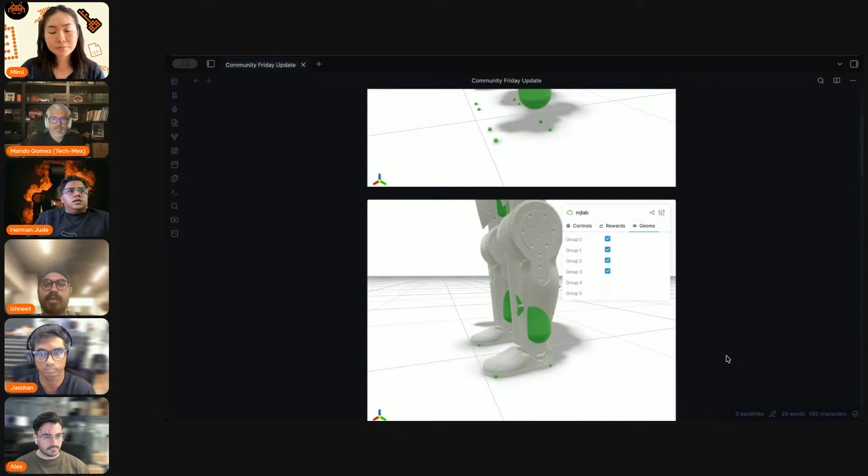So one thing we need to do on the software and training side is try imitation learning. We want to start with a very simple one, which is just squatting, because in this you're just rewarding the model to output the same joints with physics. We know the learned dynamic in this would be much more consistent, and we will know that the policy learns the right thing.

And then we can actually identify what's causing it to limp. So this is what we are doing now. We are testing a squatting policy, and this will help us not overfit to just vanilla RL reward tuning.

Also, when we brought the robot outside, we were able to bring it to a coffee shop on the second floor of a building. This was a good milestone for us because it stress-tested the robot a lot. It entered the lift, and we controlled it fully via Bluetooth.

We launched the firmware with systemd, and then we can just connect this controller via Bluetooth, and you can bring it outside. If the controller disconnects, you can reconnect. So we're testing a lot of quality of life measures to bring the robot outside and make it able to walk in events, etc. These are the results from a lot of our hardware and software debugging, and some considerations we made on our end to remodel the tool.

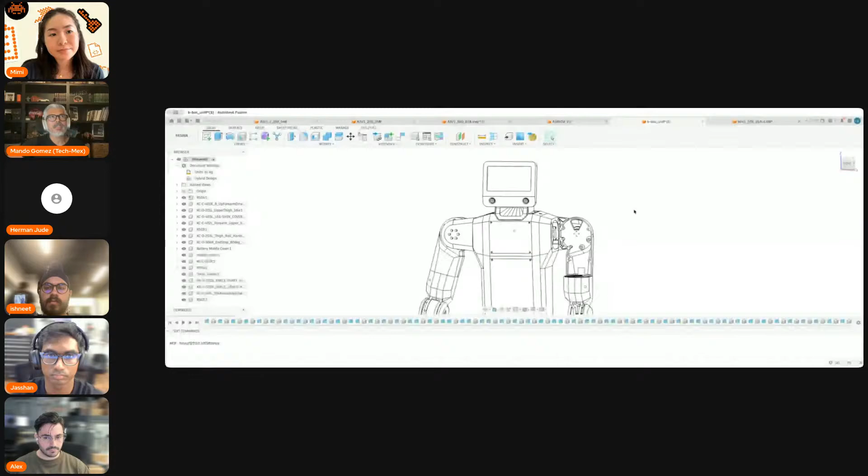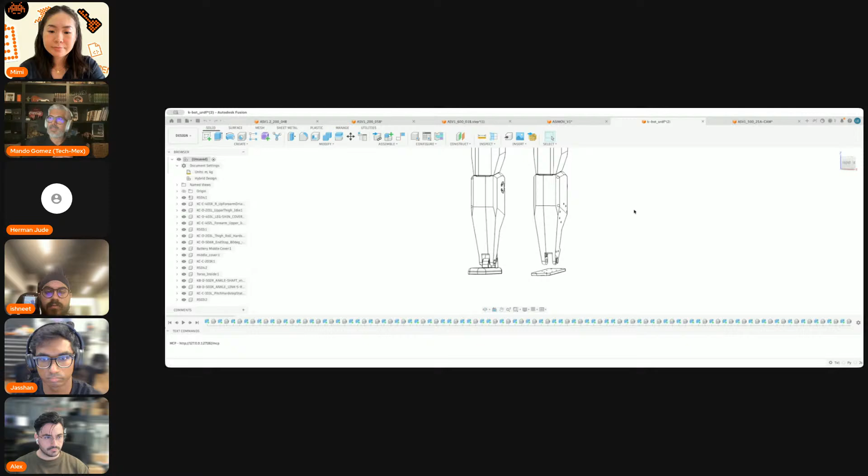So a few months back, probably September or October last year, I was looking into different open source projects, and maybe some of you might recognize this robot. It's basically the KScale KBot, and I was very curious and interested. I went to their offices in the Bay Area and was on their waiting list for the robot to ship, but unfortunately this company shut down in October, November, and I still wanted my humanoid robot.

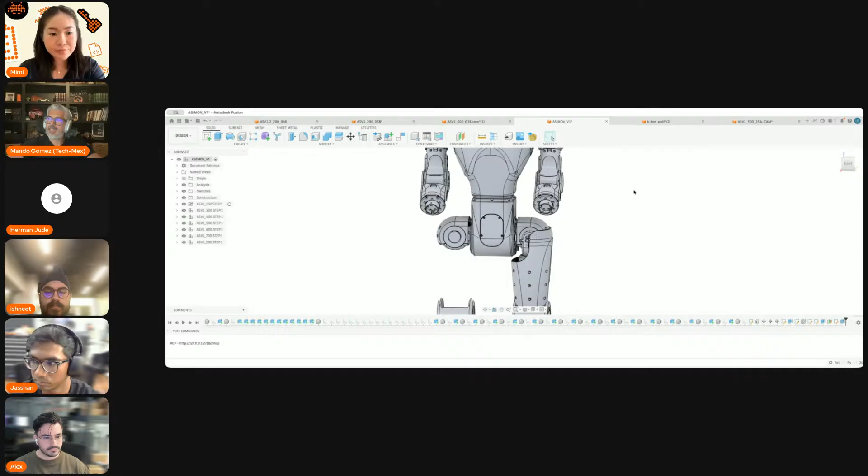That's basically by looking at different robots, I stumbled upon Asimov, and I was very excited to see the different things. I got the STEP file for the legs and started analyzing it, comparing the different open source projects, and I really liked some of the things. So I was looking at the hardware I have at home so I could manufacture some of these parts myself, and that's how I started the whole process.

The last 3 months or so, I have been learning metal casting, CNC, Fusion 360, and so on. So I don't know what questions you guys have.

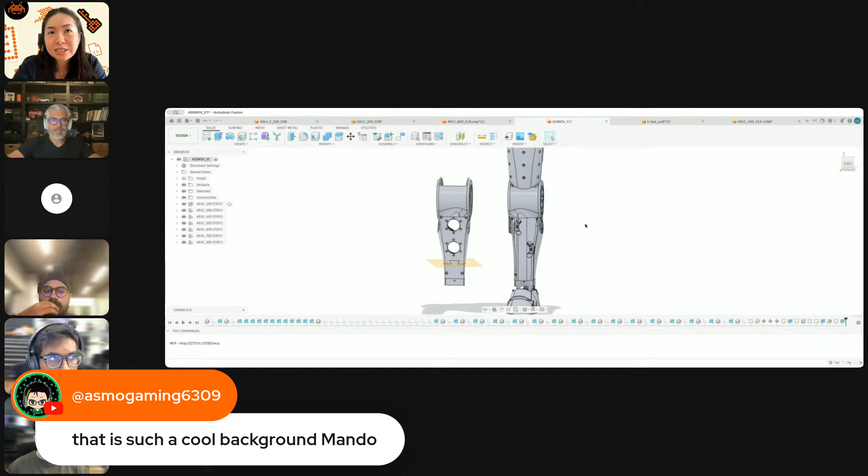Maybe you could mention a little bit more about your background and how hard or easy it is for you to actually build the robot, because I know our community members would be interested in building it from scratch, but how realistically, how hard is it?

I can tell you that there's a lot of disciplines that you have to know. You basically need to know a little bit of 3D, but I can tell you that you can learn. Right now, let me show you a little bit on my screen. Let me stop sharing here and I'll share another one. Now with Claude or Cursor, it can actually help you out. Let me share my whole screen so I can go back and forth.

So basically with Cursor, you can even connect it with Fusion 360, and you can say, hey, can you help me to do this? It's going to burn a lot of tokens, it's going to be a little bit pricey, but at the end of the day, it's going to do it for you.

In some cases it has actually helped me, because one of the things you guys have done is that some parts are very well documented. But I actually stumbled into a problem. I ordered it in January from a different company.

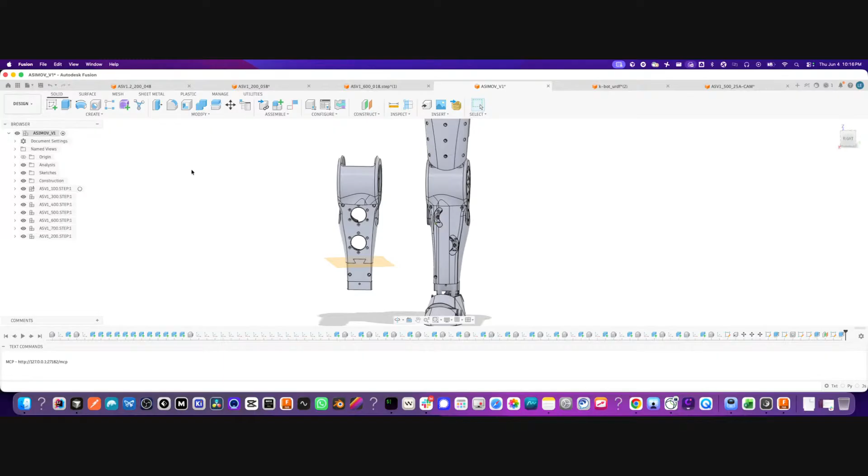Let me show you here, and by the way, they are not a sponsor or anything. This company is called MyActuator, and they were the cheapest ones that I found so far. I didn't know about Encos — if not, I would probably just go with them. But I got 3 different actuators, and I have some of them here. By the way, they are heavy. One thing that's interesting about these actuators is that it has these notches, so it's not a full circle. I kind of like it though.

It becomes a nightmare to be able to strap it properly because it's not a circle. And we have another one — this one is an X436 that is also very similar to the ones we're going to use on the shin.

I want to show you a little bit of the progress. I already have the 2 legs — one is kind of complete, I have it at the bottom. Unfortunately, you guys are removing the toes, but I actually did the toes. So it has the different parts — the ankle, the different sections. Some of the pieces you see here I machined myself, because the BOM was released a couple of weeks back, but I started machining them.

Maybe a couple of questions were asking about how difficult it might be to do it realistically by yourself — I've been doing it. Everything that you see there, I have been doing by myself.

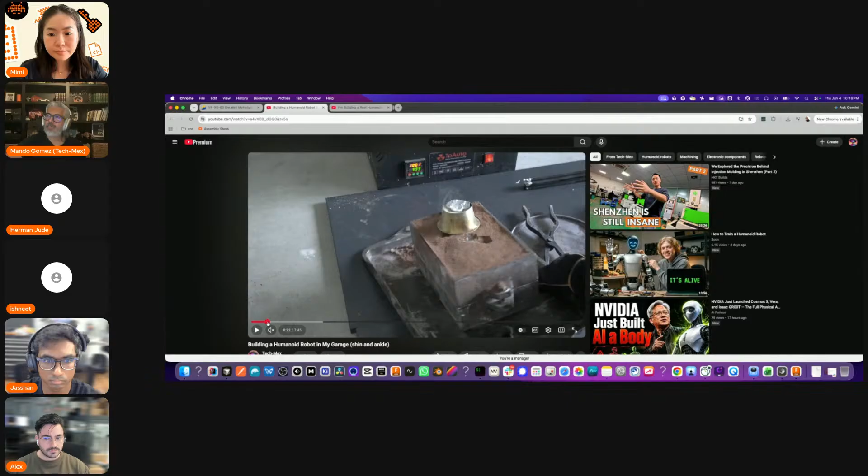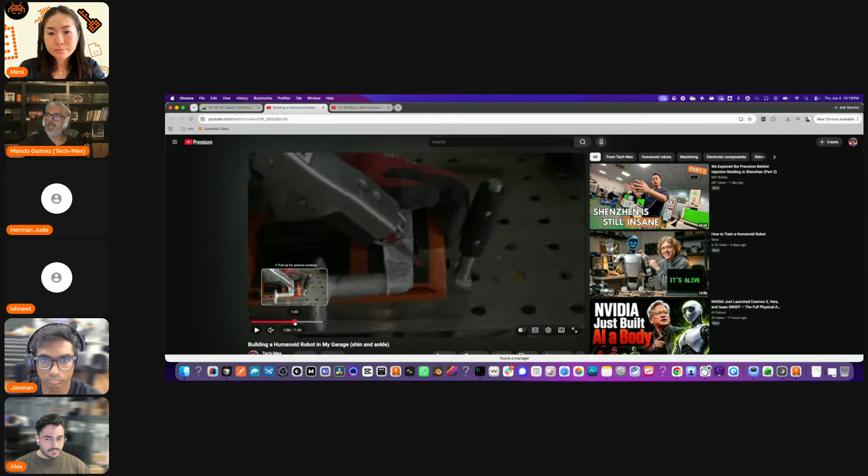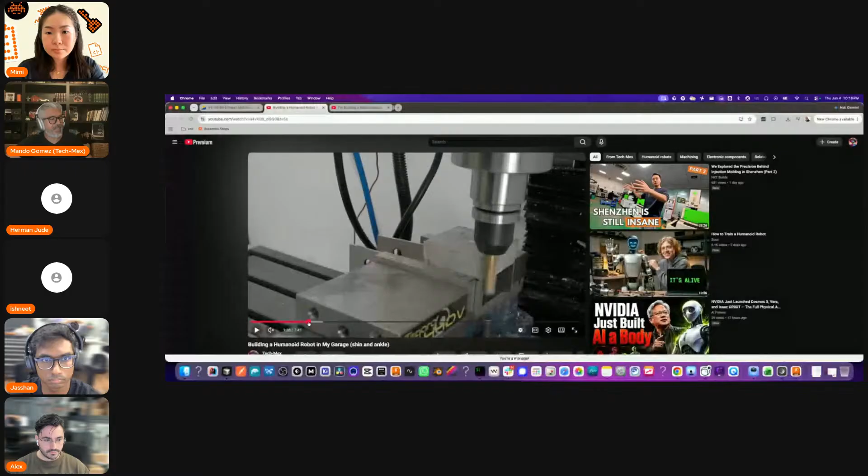You can learn a little bit of sand casting. I'm doing it myself, and I'm in the community, so if you guys have questions, you can ask me. I'm learning a lot about CNC, but there's so much information and files out there that it becomes straightforward. Ultimately it's a lot of work. If you want to wait for the kit from these guys, sure, go for it. In my case, I have 30 of these actuators, and I didn't want to waste them, so that's the reason I'm modifying a lot of the designs in order to be able to hold these actuators.

Thanks so much for working on this, it's really cool, especially the casting part. We didn't think someone would actually try to cast it, because we 3D metal printed the part. But casting actually makes sense, you're able to get the same geometry.

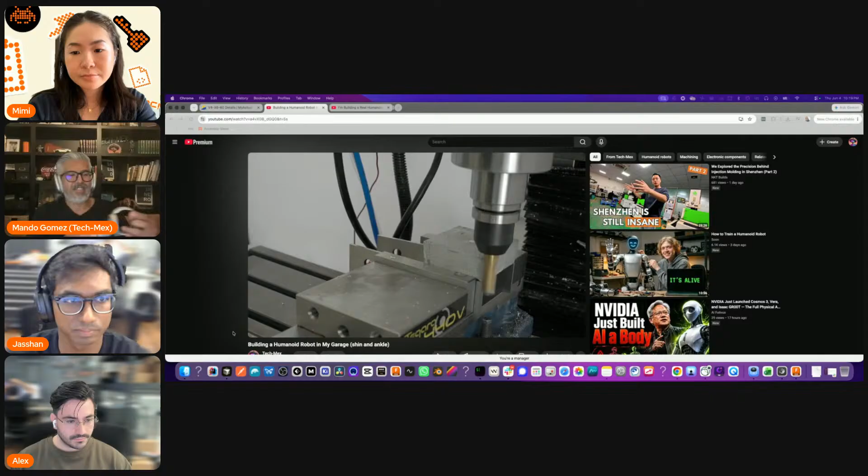Today, this is something interesting, I actually posted this. This is the one I did literally today. I'll post the video, but basically it's the strap. I know you guys have it with a gap here, and I think I have it on Fusion 360 - let me see here, maybe one of these, yes. My actuators are a little bit bigger, but this is basically the redesign, and that's a shout out for you guys. The design is very easy to modify - you have the parametric design, so you can just open it on Fusion, Onshape, or SolidWorks, and it's modifiable.

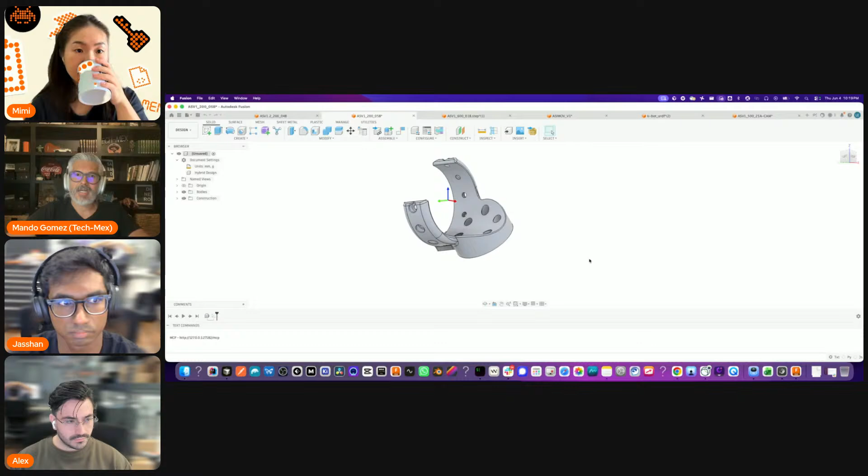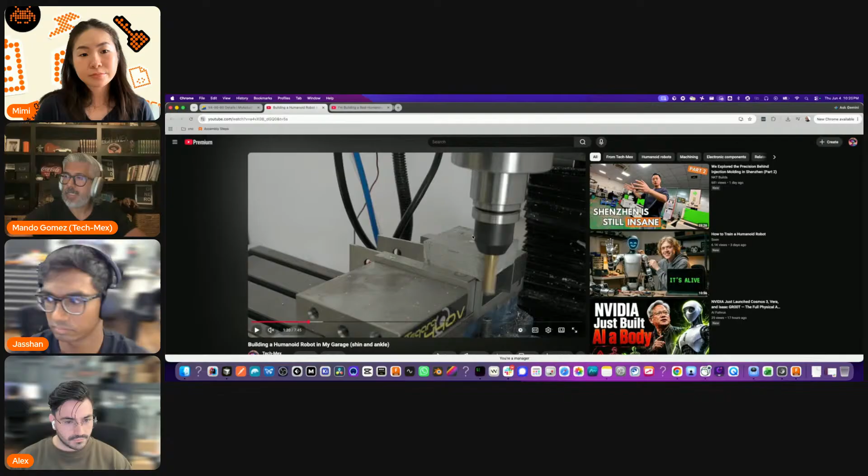Between the tools that you might need is a CNC. I have been using a Carvera, the desktop one, and I also have a conversion of a mill - this one is a Chinese mill called the G0704, and I also robotized it. Basically I made a regular mill into a CNC. I have videos in the channel showing how to do that. But if you don't want that big of a machine, you can get a Carvera.

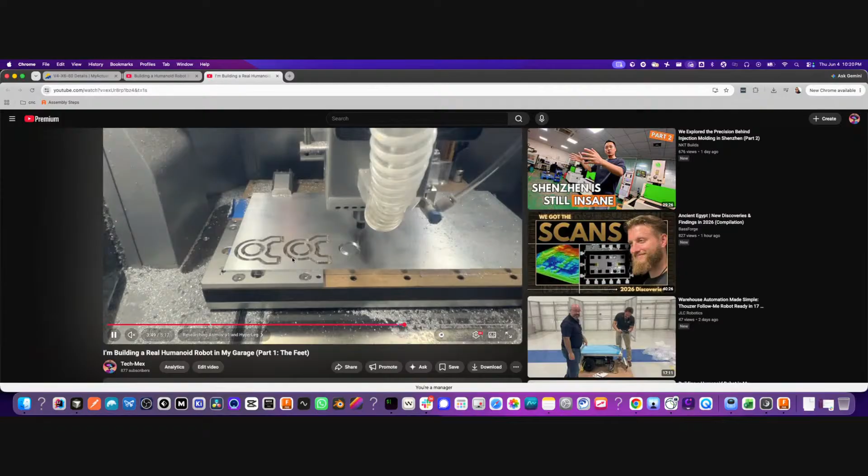So here's a snippet of the Carvera - it's gonna take a while, I think this part took maybe 2-3 hours to make. As you can tell, these ones are part of the BOMs, and maybe you might not want to build it yourself, you can just buy it from goBILDA, that's the company. But I actually even got the bearings, and literally just with pressure I put them there to preload them and press them.

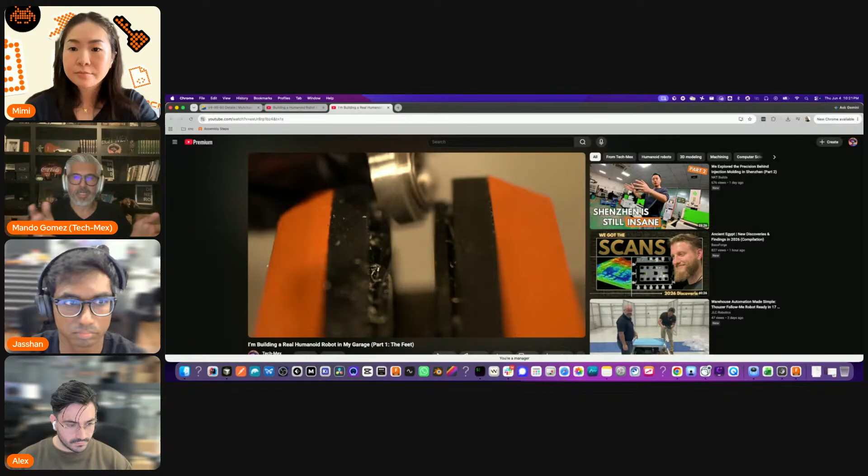So I guess you need a CNC, whether it's a desktop like a Carvera, and the other thing you want to get, a bit more pricier, is an SLS machine printer. I have a small video here, but the problem is it's big. I was also looking into different projects like the SLS4All, that's the name of the open source one. The reason you want to use that is because this material is very resistant, but the problem is that it's powder.

Right now this is my garage, and I don't have all of the equipment. If you want the whole equipment, it's gonna cost you maybe 50-60K. But you will not believe this - I actually found a used printer on Facebook Marketplace for pennies on the dollar. Anyway, I'm using Formlabs nylon 12, and you have to be very careful because this material is powder, so you obviously do all the precautions there. But once you have it, the printer is almost like the Bambu slicer, and the only thing you have to do for this is use a mesh.

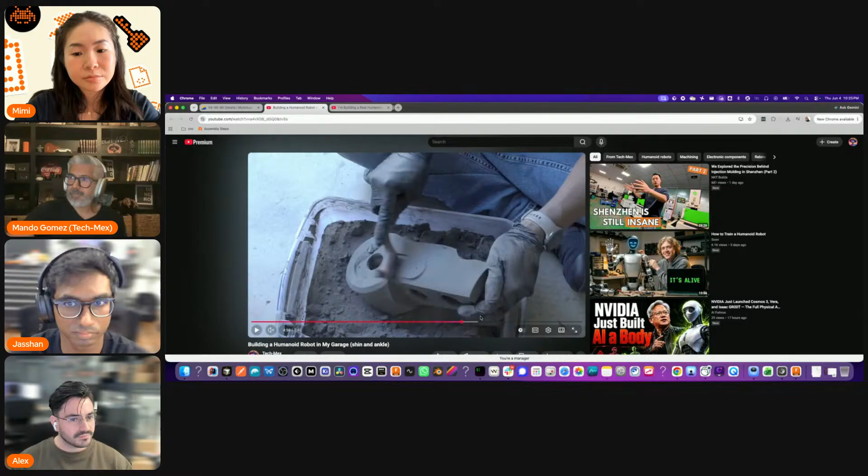One thing to notice is that this printer's size is only up to 30 centimeters, so some parts are larger than that. I redesigned this part a little bit to have a dovetail. We'll see if it breaks - if it does, I'll have to order it from another supplier with a larger printer. But yeah, I redesigned it to that.

Here's a close-up on the dovetail, and I was able to put it on the bottom. Let me see if I have - yes, I put some screws to have some mechanical load on the part, so that way I'm able to just press it.

But yeah, what questions do you guys have?

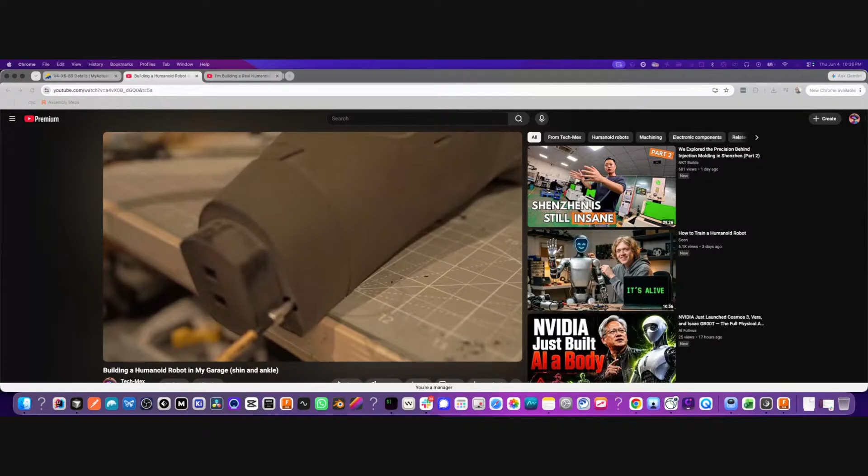For the powder clearing thing, could you use the same system? Like you just toss it in there, it rotates, right? Would that work? For what part, or for when you were clearing out the thing by hand? Could you use the same machine you used with the mesh in the beginning?

No, because let me show you this thing. What happens is that the powder, sometimes because it's so fine, it clumps - that's literally what happens. Houston is very humid, like all of this area, so even though I'm in the garage and it doesn't have AC, it clumps. So literally, when I want to start printing, I sift it.

The other thing is that because I have the cake, you can reutilize a lot of the powder - otherwise you waste it. Like in traditional FDM 3D printing, you have supports, but over here you don't need support because the powder is acting as support. You can reuse that powder.

Formlabs recommends about a 30% mix between your previous powder and new powder. That's what you want - you sift it, both of them, and then mix them in that ratio.